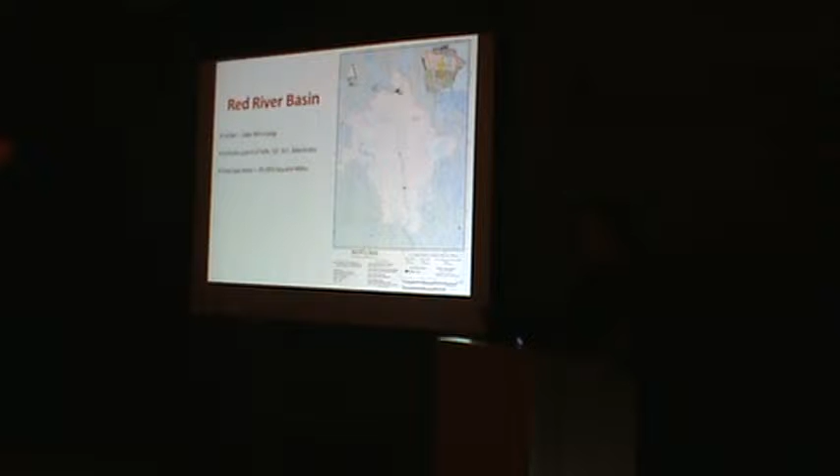So the Red River that flows down the middle of it slowly developed, not a very well developed stream, and very, very flood prone. Couple that with the fact that it flows north, so the melt pattern as it progresses south to north is about timed to coincide with the water that's coming from the south end, so that flood wave just builds on itself as it goes to the north.

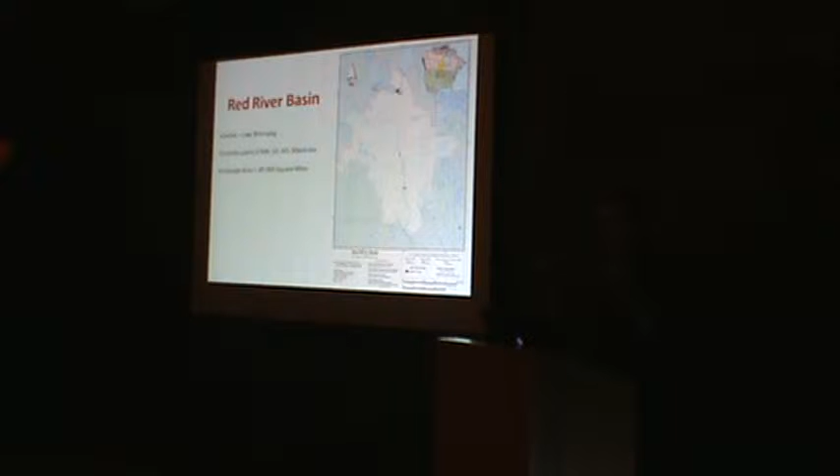A little bit of history. Flooding began, of course, as you all know, back in Noah's time. On the Red River itself, the largest flood on record up until recently, actually up until 1997, occurred in 1897. So it's about 100 years of difference there.

Back in the early 1900s, that's when most of the settlement and development of the Red River Valley took off, really. And it was made possible by a lot of drainage activity. And that primarily occurred from about 1900 to about 1920. In the 1930s, things kind of went haywire. Of course, you didn't have to get rid of any water anymore, but also with the economic depression, a lot of the land that had been converted to agriculture in the early part of the century went back. So there was a fair amount of lands that had been drained, had been settled, that were actually abandoned, and they still are today.

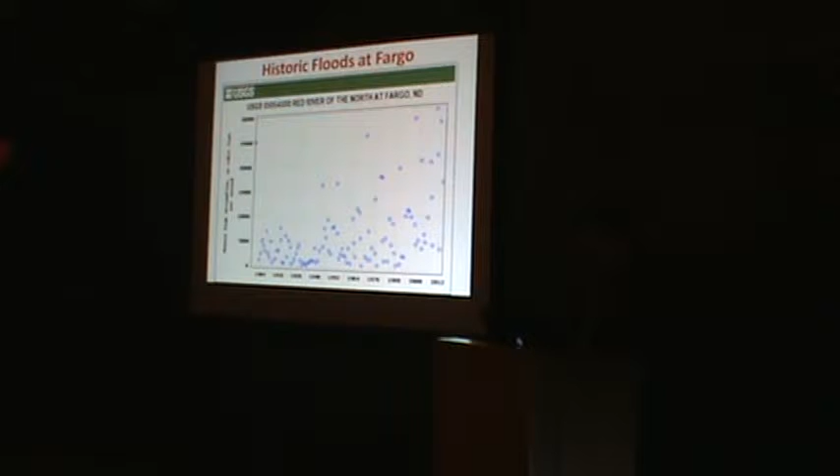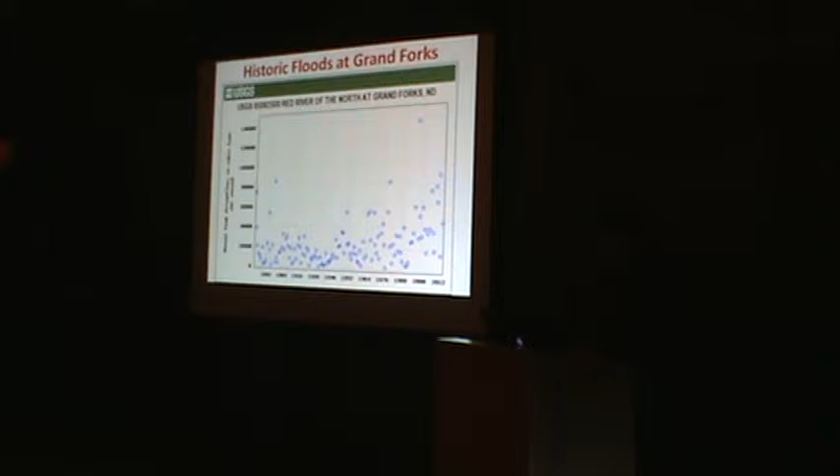A little more history, and this is maybe the more positive side of the history, at least it starts out more positive. Back in 1976, the legislature enabled a joint powers organization called the Red River Watershed Management Board. That board was established with some taxing power through its member districts to raise money basically to build floodwater storage projects. The Corps was already out of the business. They had pretty much determined they had done as much damage as they could do. But there were a lot of ideas left that were locally supported and needed a way to get implemented.

Actually, we got off to a pretty good start. In the first 15 or so years, those 9 member districts, the joint powers districts, had completed 31 projects. Almost 100,000 acre feet storage, so it was a big deal. They had a couple more under construction at that time, and there were 13 being developed, not moving dirt yet, and about 20 more proposed.

Caught the attention of the Corps, and I suppose some prodding from some environmental groups and some arguments over a couple of projects that were out there prompted the Corps to impose a moratorium, basically shut down the activity of building these floodwater storage sites. And the DNR joined with the Corps in conducting an environmental impact statement. That process took about 3 years. The outcome was really bleak.

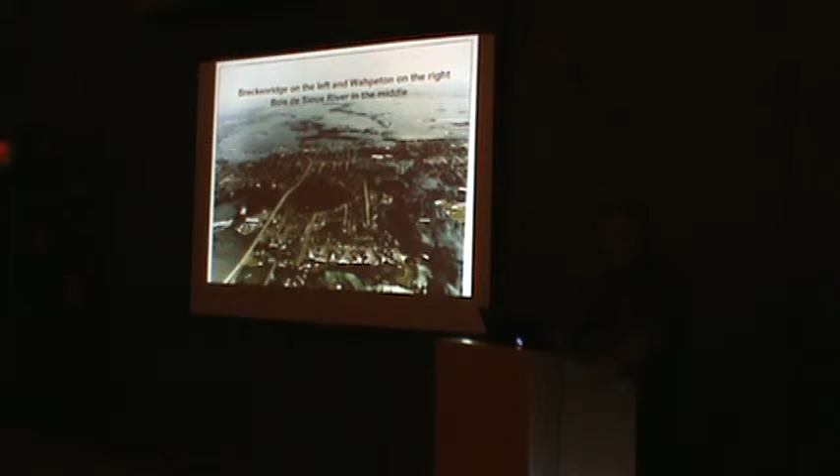Well, moving on to the kind of projects that we're building today. This is the North Ottawa project. The Bois de Sioux Watershed District is the local sponsor. And out here is an area we call the Tintah Slough. The local people who try to farm in that area think that the Tintah Slough is really on the other side of that Highway 9. So some argue about where the original Tintah Slough was, but that was all farmland. And what you see there, I think that picture I took in 2001 again, was very flood prone, real flat area. People tried to farm that for years with really limited success.

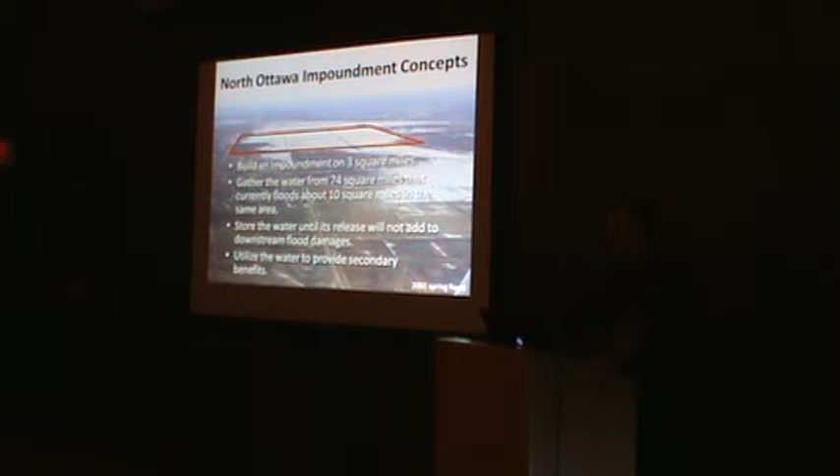We also, and again, this is part of that project team process, look at how we can use that water, which we get almost every spring. We get excess water. What can we do with that water that would be beneficial and useful? It's some secondary benefits. So we thought about these purposes. Primary, of course, is flood control. That trumps everything. It is a flood control project.

Secondary benefits, the first one, this is one that I've really pushed for my whole career up here, is stream flow maintenance. We have mostly intermittent streams in the Red River Basin. They dry up in the summer, not every summer, but most summers. And if we could provide some improvement or more stabilized base flows, there'd be some really good habitat in some of the streams downstream.

Resting and feeding habitat for migratory waterfowl and shorebirds. Typically, up until that point in time, we talked a lot about waterfowl, and we tried to work these into the earlier projects too. Don't get me wrong, we didn't go straight flood control. We were always looking at a little bit of multi-purpose, but usually, if we were looking at habitat, it was for waterfowl.

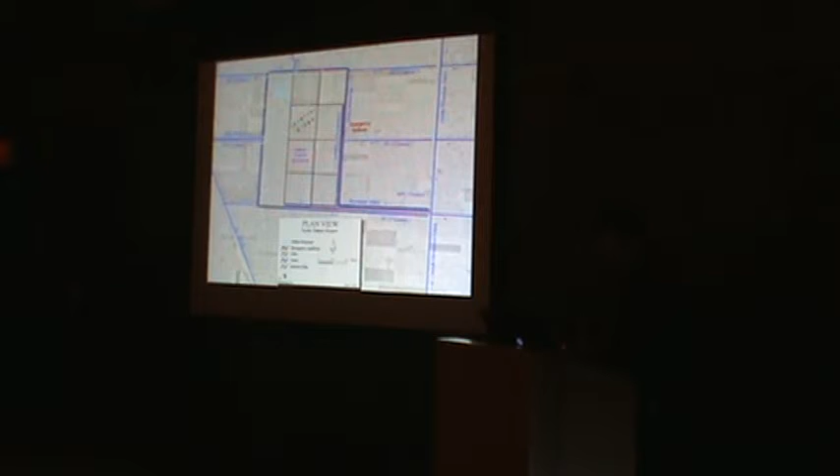The flood control objectives: we wanted to be able to take the flows from a 100-year spring flood and actually direct them into the impoundment. So we've got enough inlet capacity to pass the peak flows of a 100-year flood. Also, we wanted to be able to store without any release everything from a 10-year storm, and we actually see that quite a bit. And then limit the outflows from a 100-year flood.

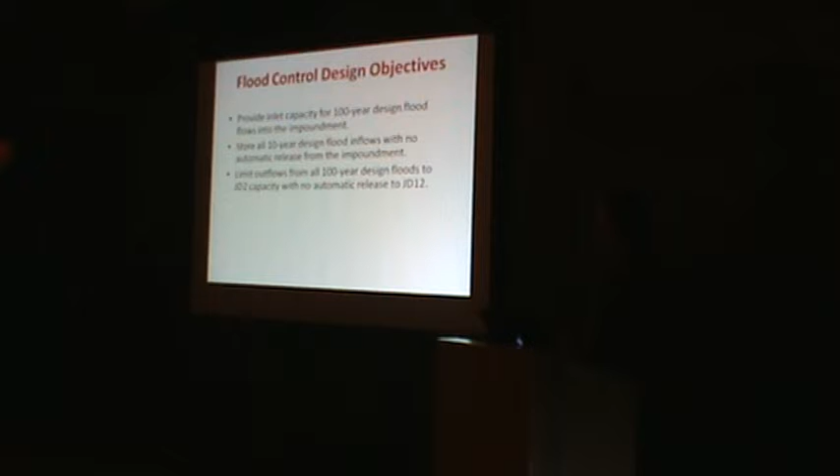In other words, we can get the 100-year flood into the impoundment, but at some point we've got to release it, and when it fills up, it'll automatically release some water, but basically limit the amount that it releases to what those 2 big ditch systems can handle.

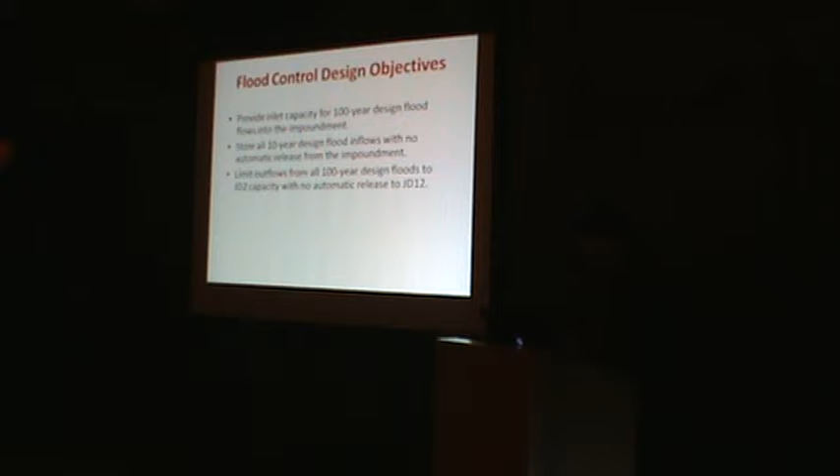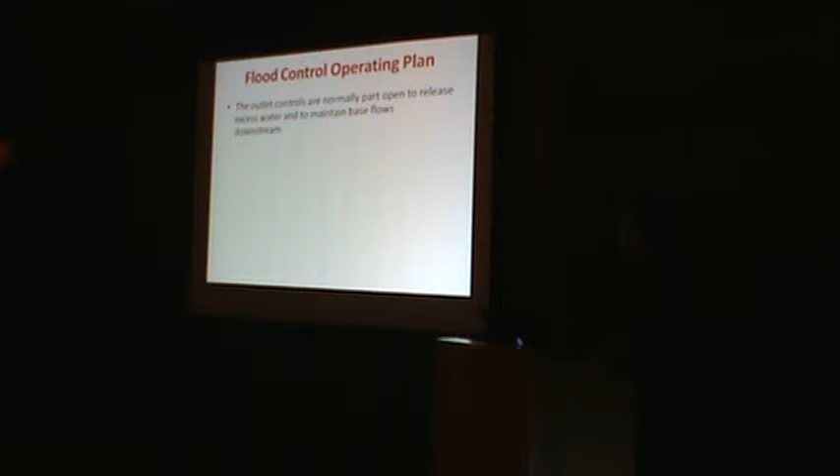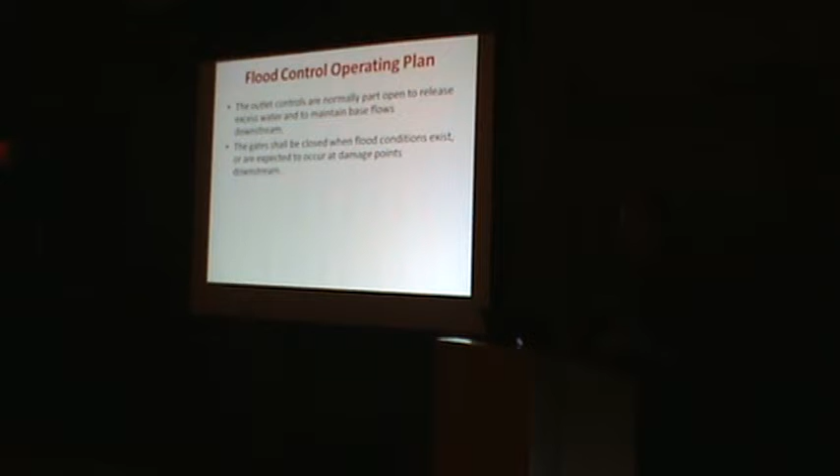The operating plan, fairly simple. The outlets would normally be partway open. That's to, of course, get rid of excess water if we have excess water, but also to provide that stream flow maintenance. So normally at the beginning of any flood, the gates are going to be just partially open, but not wide. When flood conditions exist anywhere downstream, or if we could predict that flood conditions would exist when water from this impoundment would go downstream, then those gates have to be closed.

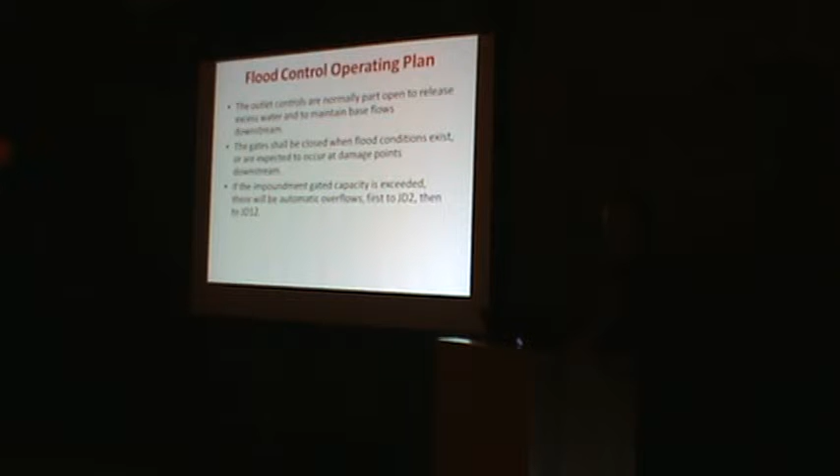If the gated storage capacity is exceeded, in other words, the impoundment is full, you would automatically start to discharge. First it will go to JD2, and then second it goes to JD12. Why that preference? There's a city, not a big city, the small city of Tintah is downstream on JD12. So it's a matter of saying, okay, let's send it where it's likely to be the least trouble.

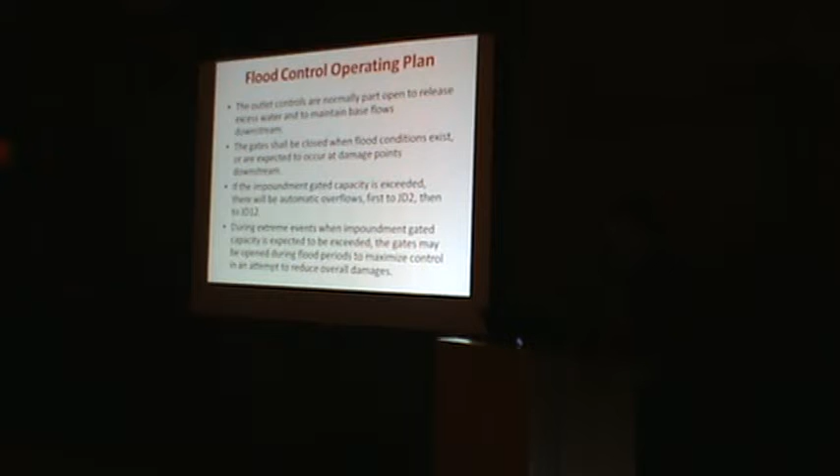If we know we've got an extreme event coming, we know we're not going to be able to hold all the water, then we may very well release some water early in the flood just to save that capacity until you really need it. Don't need to look too hard at this. Basically all the design parameters, but the numbers on the right-hand side are the most meaningful.

Gated storage is about equivalent to 4 inches of runoff. You can hold the first 4 inches of runoff that come off of that 74 square miles. How does that compare with flood size? Well, a typical 100-year flood would generate about 5.5 inches, at least 100-year floods as we know them, if they don't get worse. So you can hold almost 75% then of a 100-year flood without any release at all.

Before it gets to the emergency spillway, you add another ½ inch or so, and the top of the dam, which you'll never get to, would be 6 inches of storage. The other number up there, the 1 inch, is the amount of that spring runoff that we want to put to some beneficial use. The average annual runoff in Bois de Sioux watershed is about 2 inches,

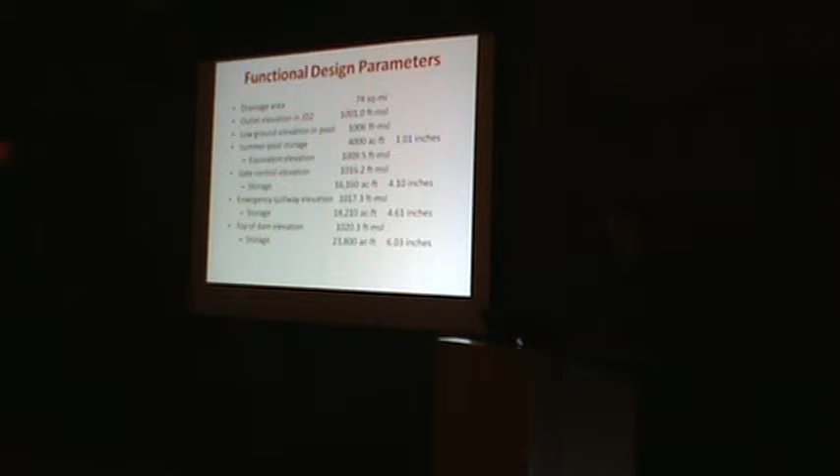so we're saying, okay, half of that average annual runoff, most of which comes in the spring, we're going to save and do something creative with it. So after the spring flood, we would draw it down until we had 4,000 acre feet left in that impoundment. Again, these parameters aren't that important to memorize.

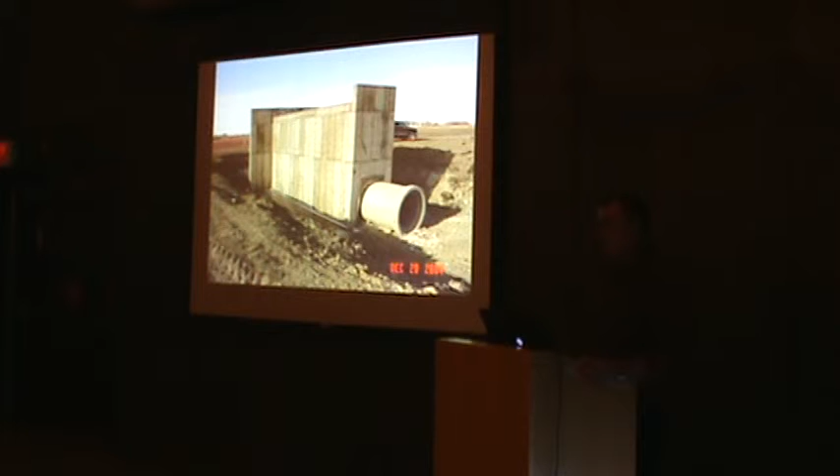And our groundbreaking for the project was about a week after that, and we did the groundbreaking stuff, so we couldn't be inside. But anyway, so they're out here in the winter, and actually worked all winter long, trying to put these concrete structures in, because at least they knew it wouldn't be raining.

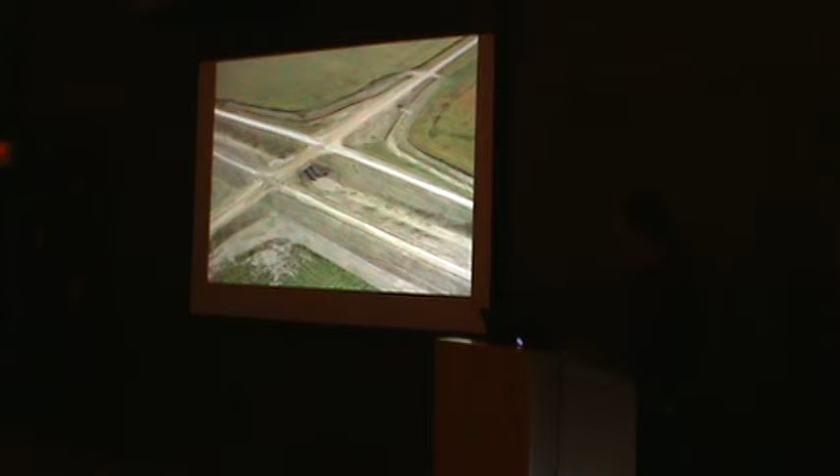This is a more finished area. That's actually along the inlet channel. Those box culverts are 14 by 14. There's 2 of them placed side by side. We got a lot of water while we were building. In fact, we're still building, and we're still getting a lot of water.

And this would be, I believe, the spring of 2009. And the pool is not full yet by any means, but it's filling up. You can see there's water over that whole 3 square miles. We actually didn't have the dike completed yet, so we couldn't hold much more than what you see right there. The ice chunks floating out in the pond basically were ice formed in those borrow areas, and it just floated up.

Another view of the same thing. Actually, this one I believe is a different year, but again, you can kind of see what it looks like during the flooding events. Charlie? Yes. That last slide, could you point out where those 8 cells are going to be going in? Sure. Here. Okay. So yeah, in the east half, those 8 cells will be there. We'll get a better look at that later.

The ground actually slopes from east to west primarily until you get to this line right here. Then it actually comes up a little bit as you go west from there, because there's another beach ridge, a small one, that gives a little bit of a rise there. You can see a little bit of bare ground sticking up there in the northeast corner. The inlet to the impoundment, the inlet channel right there.

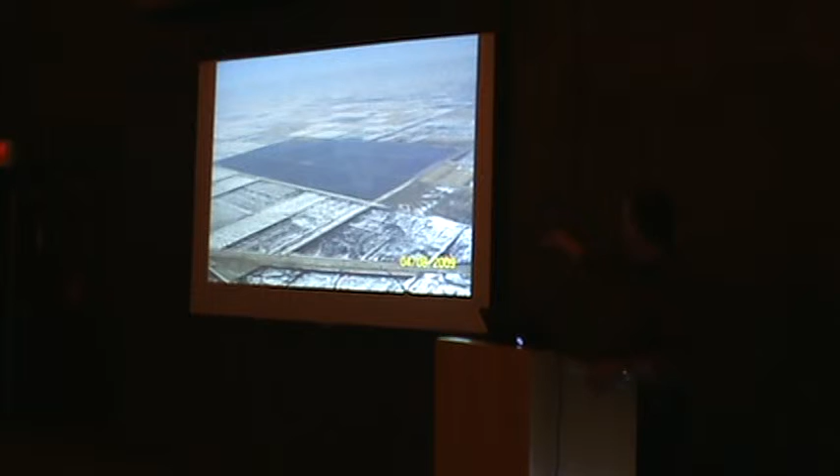Okay, let's talk a little bit about those secondary objectives. Downstream flow augmentation. So far, we're just doing that over the open water season. We certainly could do it all year long. We haven't tried that yet. But doing it over the open water season, we can provide a continuous outflow of about 5 CFS in a normal year. Wetter years would be more. The effects of that would be to improve the fishery downstream and also enhance water supply.

Provide feeding and resting habitat for migratory birds. Feeding areas for the shorebirds, this is what I'm told. I'm certainly no expert at all on shorebirds or waterfowl for that matter. But that's where the project team process really helps, because those experts are at the table. They like to feed in mudflat areas. The water goes down, the shorebirds come in and feed on whatever they're finding on mudflats.

Feeding areas for waterfowl. We take some of that water that's coming off of a pool that we're drawing down to expose mudflats and put it into reflooding an area that has some other vegetation, might be crops, might be just volunteer weeds, whatever. But that makes for good feeding area for the waterfowl, that's the theory.

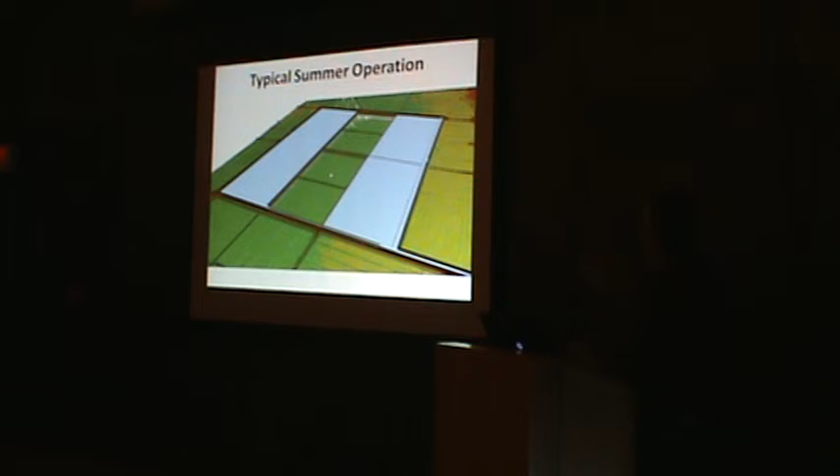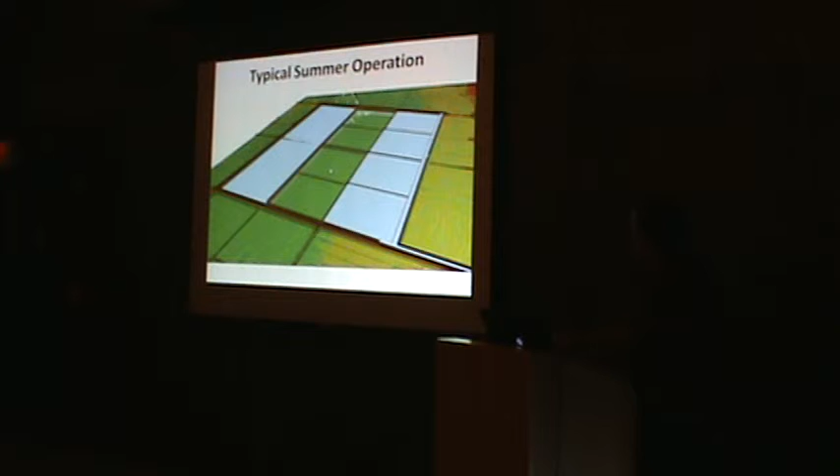This is animated, so you kind of watch it. After the spring flood, we're drawing down to that 4,000 acre-feet, that's about what we're at right now. And all the time, you don't see water coming out the north end, but there's water coming out the north end. You can see that mudflat area opening up on the northeast pool, A1. Now we're starting on A2, A3. You see the D pool starting to reflood.

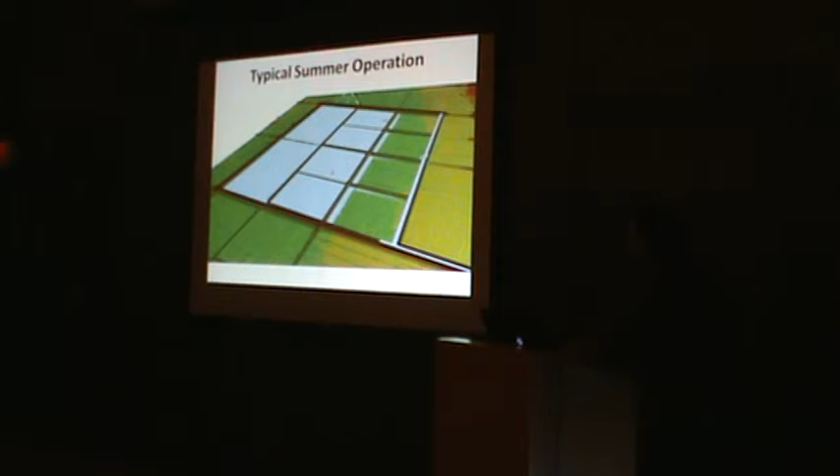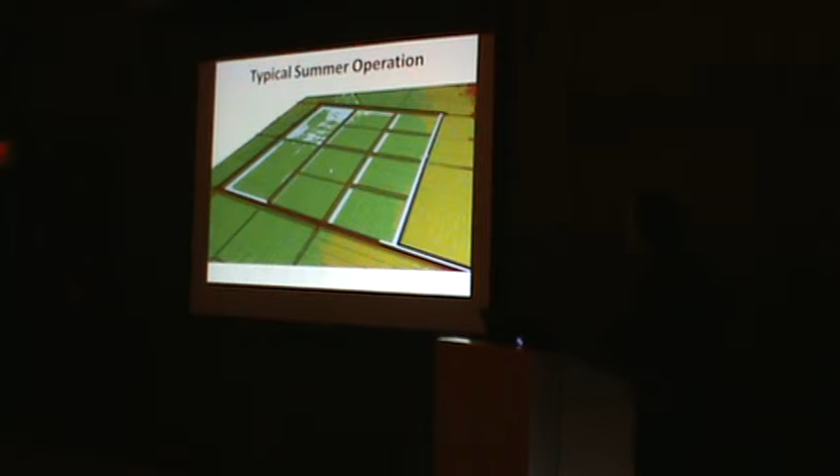When we're done, well, I'll let this finish, I'm sorry. Now the D pools are drying off. The idea is to get the pool empty before it all freezes up. So basically by 1st of December. Well, that's a typical summer operation. We can actually vary that. We can drain any of those A pools first. We can fill any of the D pools next. You know, when we get the plumbing all installed out there, we'll have the ability to really move water around.

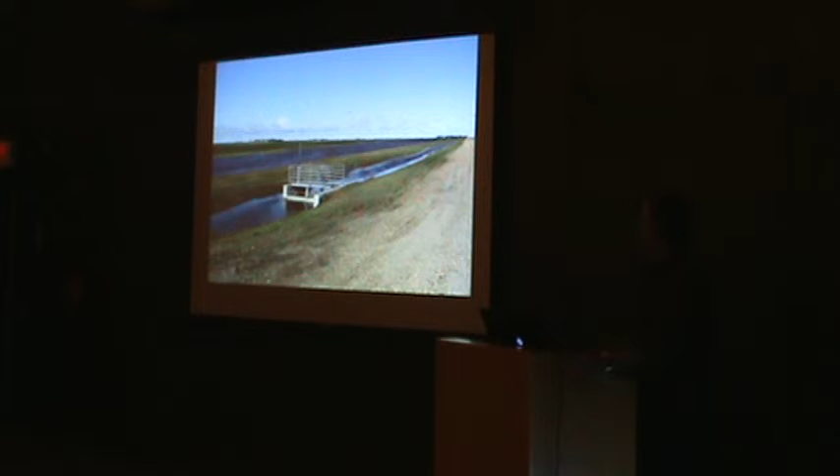This is one of the outlet structures, and I mentioned that wave protection berm. This is probably about the first year after construction there, and you see this long wet area. That's a swale within that wave protection berm. We can go into the dynamics of the wave protection if you want, but you're probably more interested in what really turns out to be a type 1 wetland. That's that same area after the vegetation has established.

Out in the middle, this is pool C. Cattails, I don't know how they did it, but when we first put water on that sucker, they just appeared from everywhere. So there's a stockpile of cattail seeds. Another look at all that structure. The big bluestem, right? That looks like Indian grass. Oh, okay, Indian grass, I'm sorry.

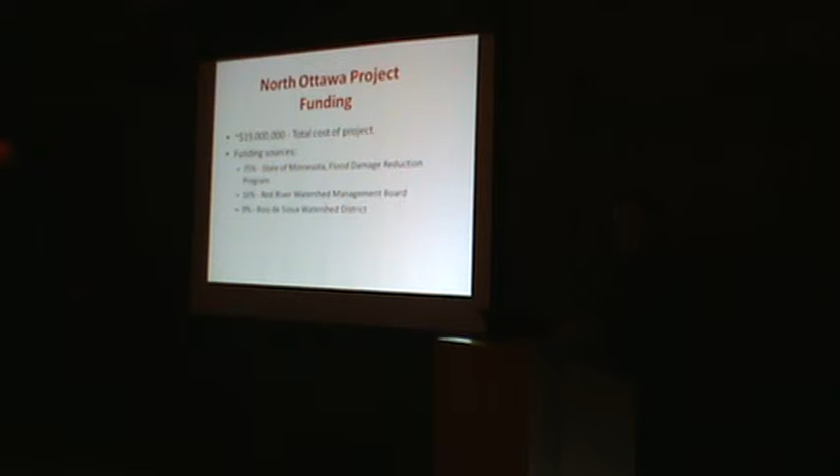Okay, that's my last slide. I'm going to talk about some numbers. Oh, it wasn't my last slide. Sorry about that.

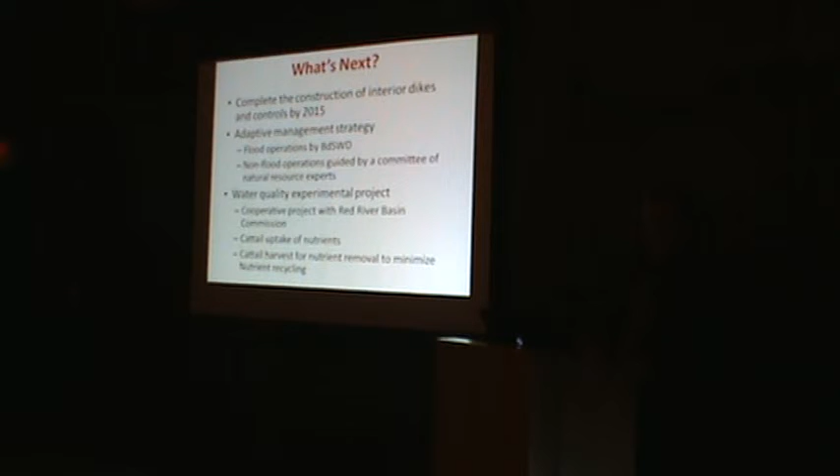So that's an experiment that actually could start as early as next year. The Basin Commission has gotten at least one grant, and they're applying for more to do a study out there. Yes, ma'am. Are they going to be harvesting those with ice mowing, or do you know the methods and what they're going to do with biomass? I'm sorry? Do you know how they're going to harvest it? Are they going to ice mow it? That's a really good question.

Well, one advantage we've got that most cattail marshes don't have is we can drain the darn thing. We can go in there with conventional equipment and harvest it. But I don't see us going in there and harvesting the whole thing like we would a crop. We'd probably do it more creatively and open up areas, just open a different area each time. And are they doing anything with the biomass?

Well, there is a farmer right next here that has cattle. So obviously, one of the first choices would be to feed it. But some say that that's not good food. Others say once they get used to it, they'll do just fine. So that's part of the experiment. What the heck do you do with the cattails? They talk about biomass burners and all of that. Well, those are nice ideas, but not particularly practical. But let's just see where that goes.

The main goal for us is to get rid of the nutrients, especially with TMDLs. Virtually every stream in the Red River Basin either has or will have a TMDL. And we need to figure out ways to deal with that. That is the last one. North Ottawa. Redpath project.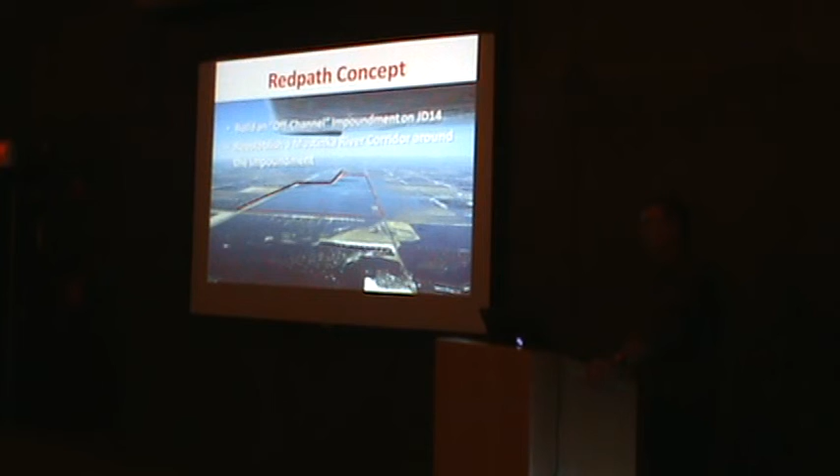Here's the concept there. Again, you see a big flooded area. JD 14, that line right there. There used to be a river there, the Mustinka River. But the Corps fixed that. We have JD 14. Okay, so what are we going to do? Build an off-channel impoundment on JD 14, following that red outline. Reestablish a Mustinka River corridor around the impoundment.

Again, look at the plumbing. You can see where we think the old Mustinka River was. The Mustinka River was a lot of different places. If you can imagine, we come out of the Beach Ridge area, it was a lake. So there's kind of a delta there. And like most deltas, the water takes different courses. So there are fragments of channels scattered around out there. But that's kind of the main channel that was there before the JD 14 construction.

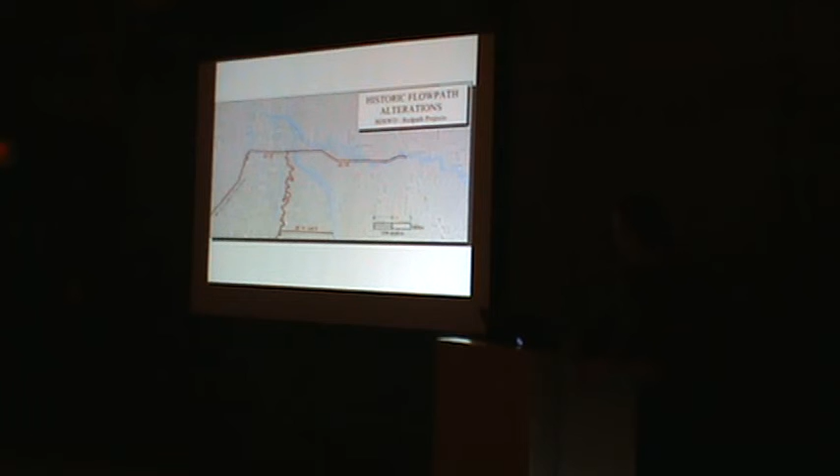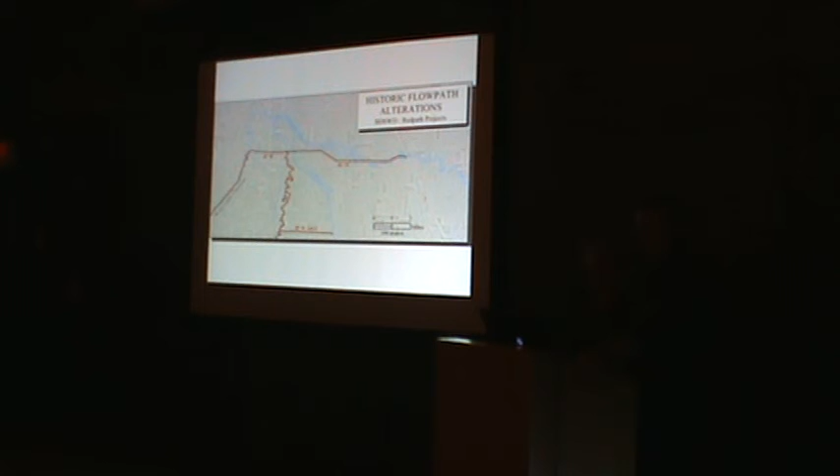JD 14 also included some work on a major tributary, 12 Mile Creek. That was just clearing and snagging, so that's still crooked. And then there was a cutoff channel as part of that project that actually took water from 5 Mile Creek over into 12 Mile Creek. So a major plumbing effort. It wasn't the only plumbing that's gone on out there. You can see again, we're in an area where there's a legal ditch virtually every mile. Looking at 5 Mile Creek, you can see it gets cut off every mile. Pretty elaborate system.

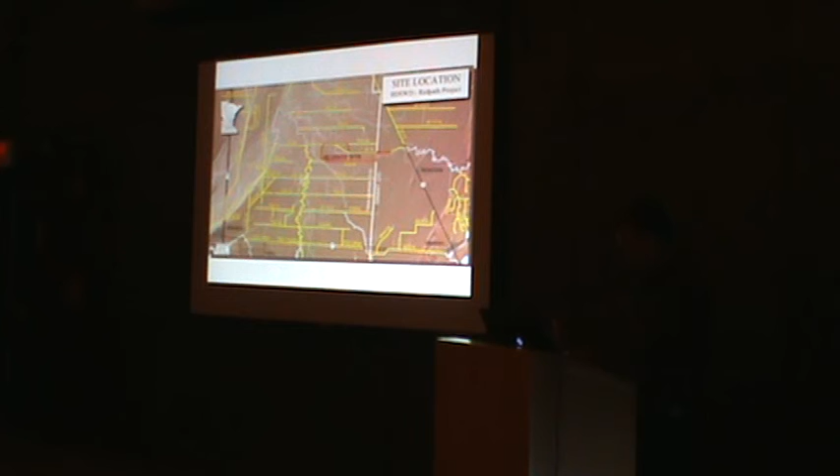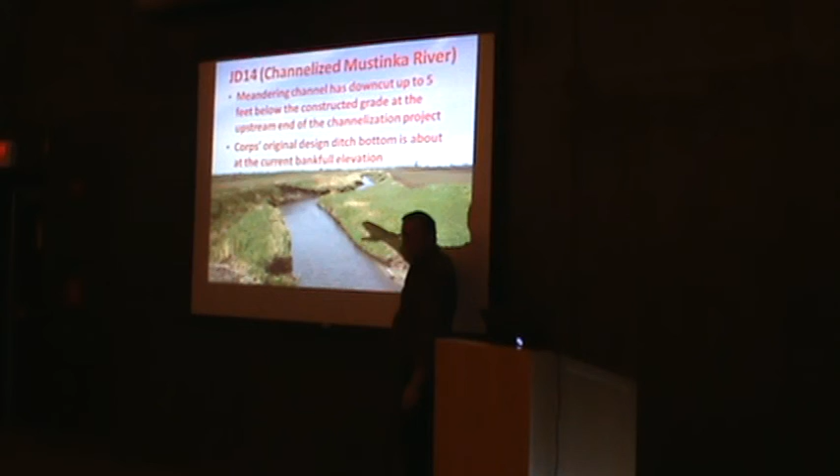JD-14, there's a picture of JD-14 today, well, actually a couple of years ago. The meandering channel that you see is in the bottom of JD-14. The original design would have had the bottom of the channel right about here where the bankfull of the meandering channel is. There's a little bit of deposition up there, but not much, frankly.

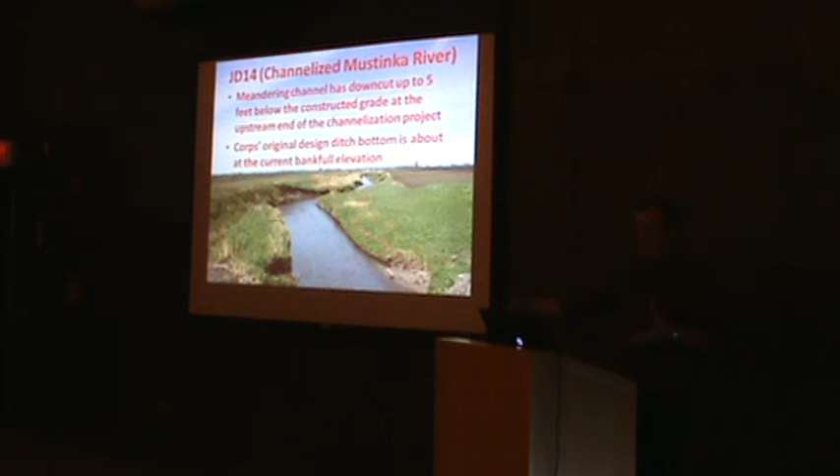What's really happened over the years is down cutting. And it's down cut by up to about 5 feet at the upstream end. The design on this wasn't real good, particularly at the upstream end. They basically tried to get the grade back up to where the Mustinka River was, so it got wide. It's a mess.

Drainage area upstream of this one is much bigger, about 200 square miles. The impoundment itself is about the same size, about 30 square miles. There's a big difference. Well, no, I won't try to do it. But you can see there is a lot of natural storage still up in that upper part of the watershed.

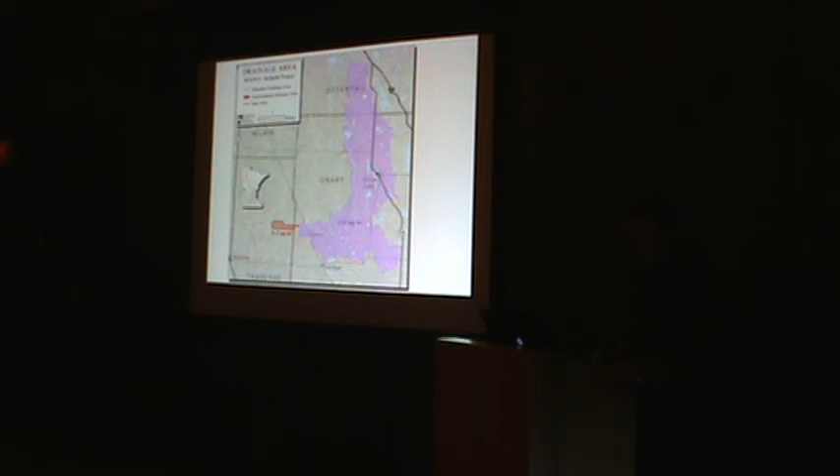Of course, as good citizens, we try to find a spot to put these projects where there isn't a lot of existing wetland out there. And I think we hit it about as well as we could, and it turns out to be a place where it's feasible to build a project.

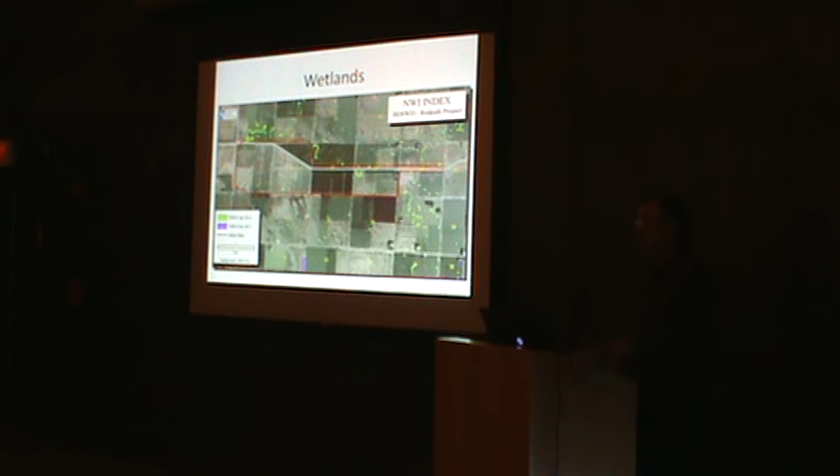Proposed project benefits: primary, reduce the downstream flooding, of course, on JD-14. Breakouts to the Rabbit River, I didn't talk about that, but when JD-14 overflows, now water doesn't all just follow it and go down to Lake Traverse, to the reservoir there, it breaks out, goes north, adds to the flooding on the Rabbit River, bypasses that big flood control reservoir, goes on to Lake Traverse itself.

When the water's high there, there's a lot of flood damage. When you go to the Bois de Sioux River, you benefit that, and the Red River altogether. Basically, reduce cropland damage, farmstead damage, road damage.

Secondary benefits: provide or improve fish and wildlife habitat, in-stream habitat for fisheries, improve that. Create a wetland spawning area for northern pike, which the fisheries guys said, hey, Lake Traverse needs more spawning area in the stream. And then again, feeding and resting areas for migrating birds.

Water quality improvement here, primarily reducing erosion, some of that erosion that you saw just within the channel itself, of course, as well as cutting down on that overland sheet flow erosion that we get in the ponds. And drop some of that on there. Recreation here, along with bird watching. This area isn't bought, no decision made yet, but we don't anticipate creating a refuge here, so there'll be hunting allowed on those lands.

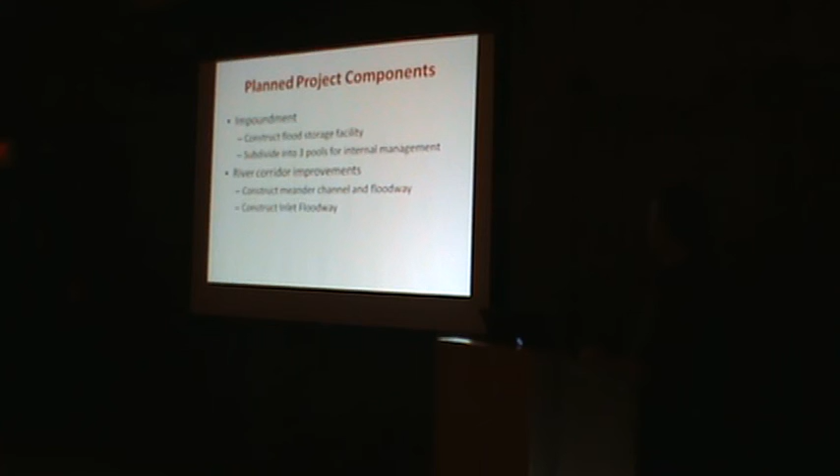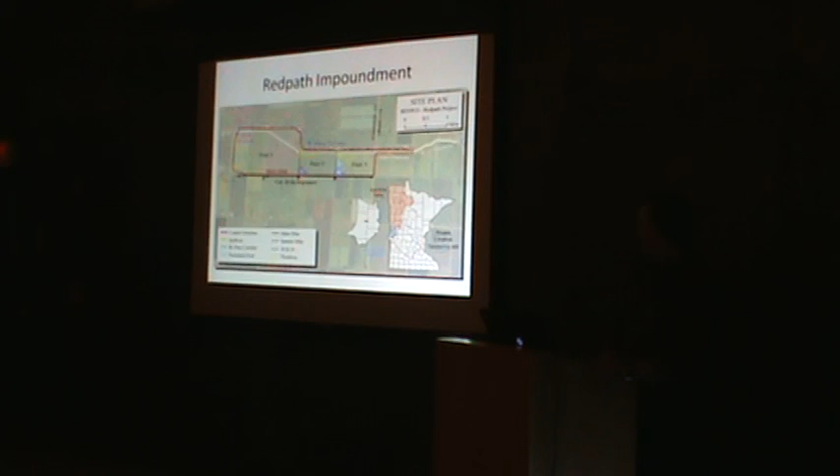If you remember what I said, this is kind of a delta area, so the land along the river is actually a little bit higher than the land a mile away. So there is no natural valley there. We're basically excavating a valley. Flood operation, pools will automatically fill sequentially in this case.